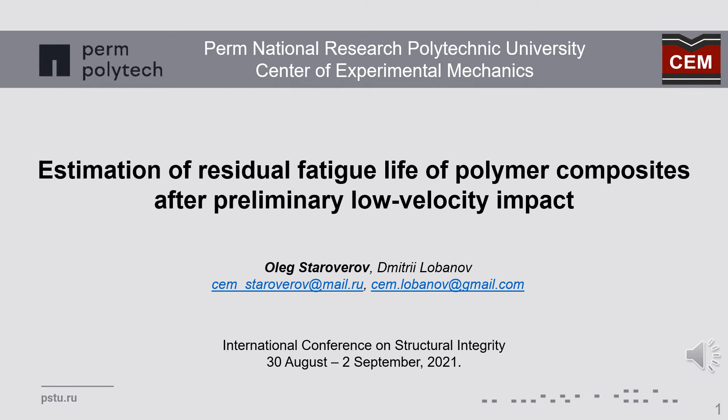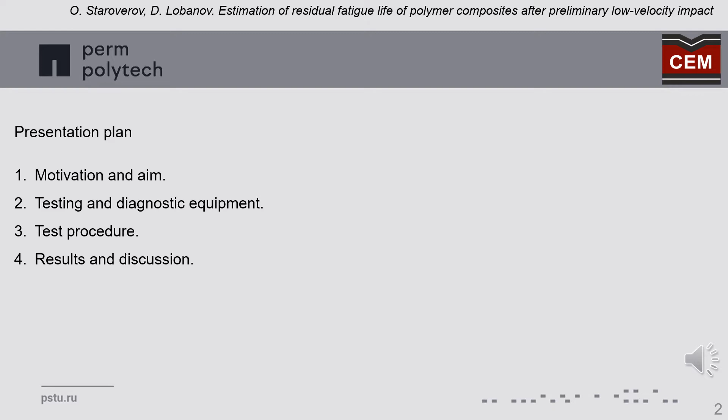For laminated composite materials, one of the most dangerous types of load is a shock impact in the transverse direction relative to the layers of the composite. Such impacts lead to the appearance of delamination in the structure of the material, which in turn is reflected in a decrease in the resource of structures made of composite materials.

Shock impacts are especially dangerous after which it is impossible to assess the damage by visual inspection of the construction or samples. In such cases, it is necessary to carry out a complex of studies with the joint use of non-destructive flaw detection methods.

Therefore, to describe the processes of damage accumulation and destruction of composites, as well as for the design and operation of composite products, experimental data are required on the change of strength and deformation characteristics under various loading parameters, including under cyclic and low velocity impacts.

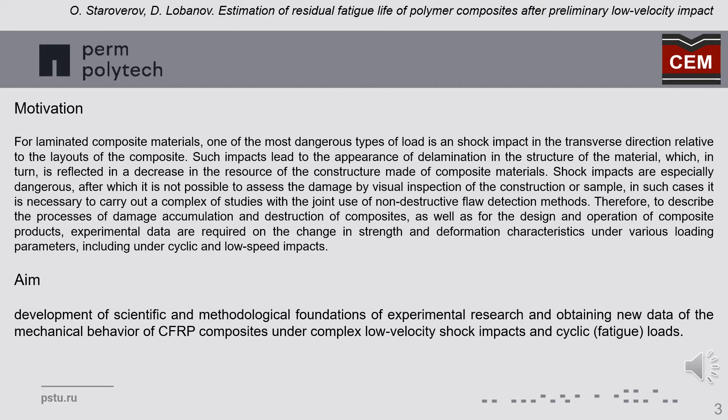Based on this, the aim of the study is formulated as development of scientific and methodological foundations of experimental research and obtaining new data on the mechanical behavior of carbon fiber reinforced polymer composite materials under complex low velocity shock impacts and cyclic loads. Equipment of the Center of Experimental Mechanics was used in the work.

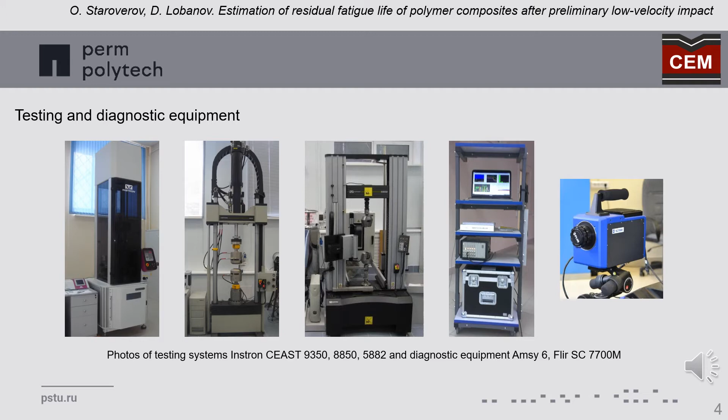The slide shows a photo of a drop weight testing system, a system for cyclic fatigue testing, and a system for static tension tests. Also used in the work were a diagnostic system for recording acoustic emission signals and an infrared system for recording temperature fields. The object of the study was a CFRP specimen with a concentrator of an operational nature.

The study was carried out with a preliminary shock impact by a falling weight according to 3-point bending, then subjected to cyclic stretching. In accordance with the developed technique, the value of the strength limit of the carbon fiber under study was determined from a quasi-static tensile test.

The nominal fatigue life Nmax is obtained from tests with the parameters: maximum stress in the cycle sigma max equal to 0.75 sigma b, the asymmetry coefficient R equal to 0.1, and the frequency 20 Hz.

During the cyclic test, the frequency and amplitude of the loading were selected in such a way that the heating of the sample did not exceed 20 degrees Celsius relative to the temperature at the beginning of the test. From experiments of impact bending, the potential energy Emax was determined, at which the samples were destroyed.

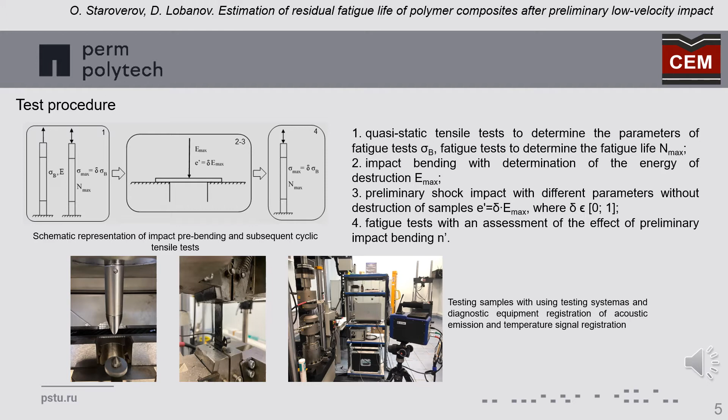Further tests for preliminary impact according to the 3-point bending were carried out in the range from 0.3 to 0.9 of the destruction energy E. Single blows were made across the entire width of the samples. After impact, a visual inspection of the samples was carried out.

Microstructural studies and analysis of fracture patterns of prototypes under complex shock impacts and cyclic loads were performed using a stereo microscope. With impact energies of 0.33, cracks formed from contact with the striker near the surface on which the impact was struck.

While on the front and back sides of the samples, cracks, dents, chips and other types of damage that can be detected by visual inspection weren't observed. Impacts with energies in the range from 0.5 to 0.66 led to the appearance of cracks near the back side in relation to the impact side. With an increase in the impact energy, defects were formed in the form of delamination.

Subsequently, the fall of the load with the intensity in the range from 0.75 to 0.9 contributed to mixed types of damage in the form of delamination and cracks in the transverse direction with local destruction of fibers. Upon visual inspection, cracks with residual deflection were observed on the front and back sides of the samples.

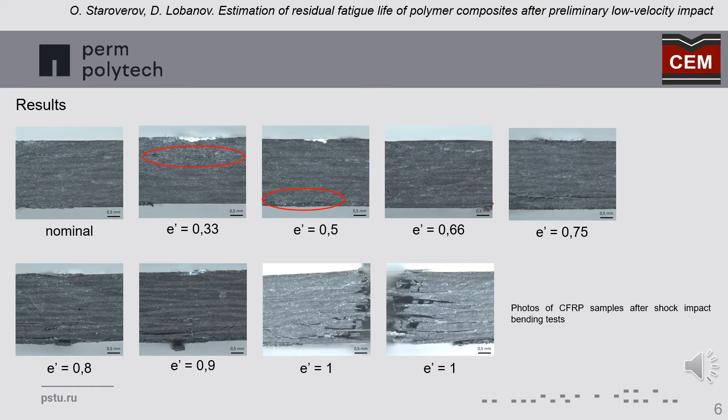The photo of fractures of specimen tested for fracture in three-point bending by impact with the falling weight E1 shows multiple fiber breaks and delamination in the longitudinal direction, in relation to the orientation of the reinforcement layers. As a result, experimental dependencies of the influence of different intensities of impact bending on residual fatigue life of carbon fiber specimens were obtained.

Analysis of the diagram of the change in the residual fatigue life made it possible to reveal the presence of a shock sensitivity threshold. Impact loads with energies exceeding the threshold value lead to a significant decrease in fatigue life, by more than 10% of the nominal value of number of cycles, maximum number of cycles, for the studied carbon fiber composites.

In the case of fatigue failure without preliminary impact, the carbon fiber reinforced plastic specimen delaminated through the entire working area. Broken threads and multiple delaminations are visible on the fractures.

Similar fracture patterns were observed for fatigue after impact with an intensity ranging from 0.33 to 0.66. Impacts with energies ranging from 0.75 to 0.90 contributed to a mixed type of fatigue failure. The photo of the destroyed samples shows the zones of fiber rupture with longitudinal cracks. This type of fracture is similar to interlayer shear.

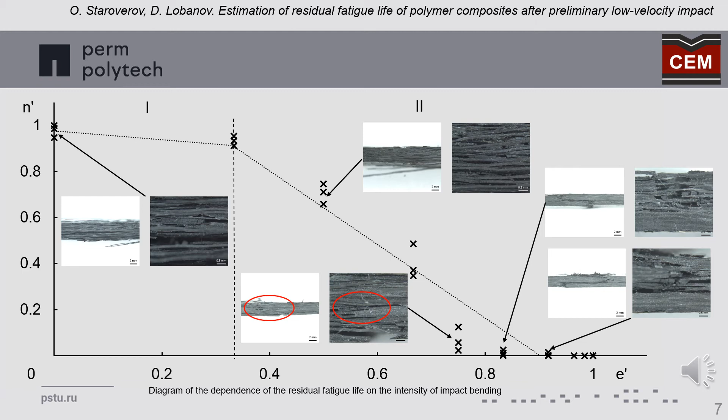The complex use of methods of infrared thermography and acoustic emission was applied. The combined use of these methods allows obtaining additional experimental data characterizing the mechanical behavior of the composite during cyclic testing, the appearance and development of defective structure.

In order to assess the intensity of processes of accumulation of damage, the dependencies of the change in the maximum temperature on the time under cyclic loads are considered. The delta T value was determined as the difference between the current value of the maximum sample temperature during cyclic loading and the initial one.

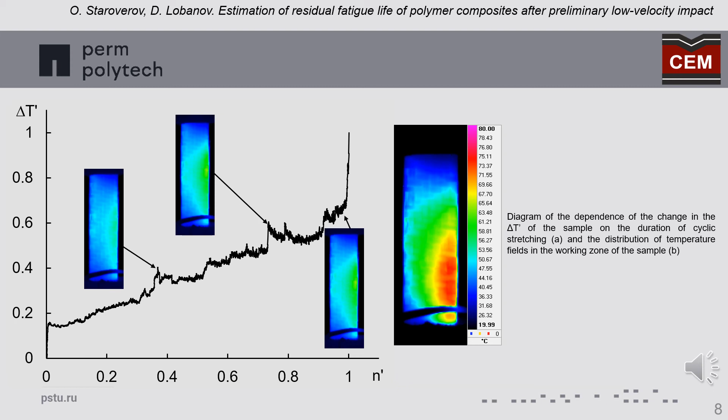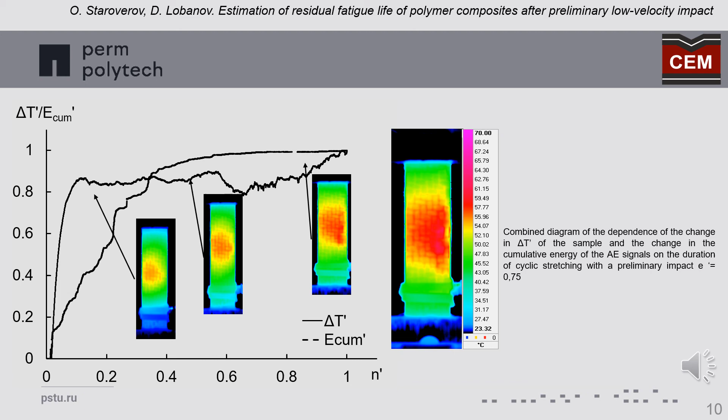A complex experimental study of the effects of preliminary impacts of various intensities on the fatigue life of structural carbon fiber composites was carried out using the test and diagnostic systems for recording acoustic emission signals and temperature fields. The thresholds of the shock sensitivity of the studied carbon fiber reinforced plastics were detected. The fracture patterns of specimens after impacts and subsequent cyclic loads are analyzed. A relationship is shown between structural damage resulting from pre-impact and mechanical behavior under cyclic loading.

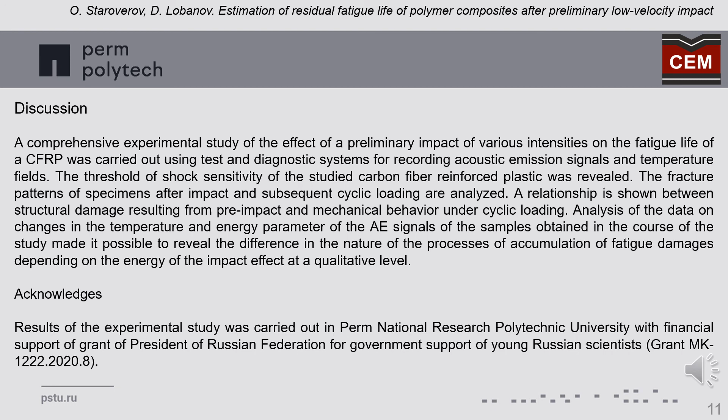Analysis of the data of changes in the temperature and energy parameters of the acoustic emission signals of the samples obtained in the course of the study made it possible to reveal the differences in the nature of the processes of accumulation of fatigue damage depending on the energy of the impact effects at a qualitative level.